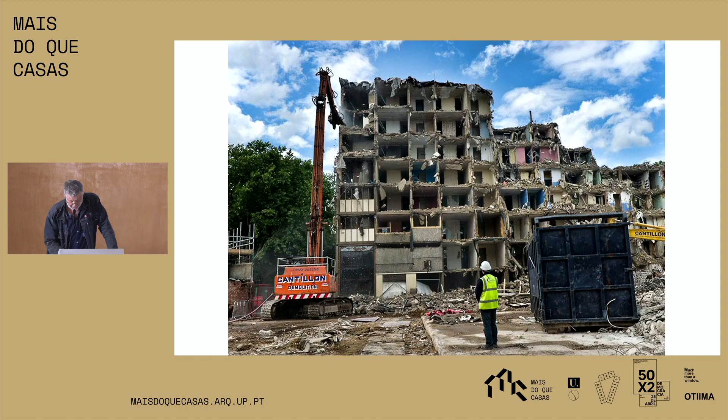That figure is now 15%, with the consequence that we now in London, one of the richest cities the world has ever seen, have 7,000 street homeless people living on the pavement, and another 30,000 people living in inadequate or poor accommodation. And that's because housing in the UK, and as it has for much of the world, has become a commodity—something that you buy and sell, something that pension funds invest in, something that global capital invests in, rather than seeing it as basic infrastructure.

So this is a question of inequality, and these are choices that we as a society make about the priorities that we have. There is no reason why we should be having homeless people in our country. And I think three things need to happen in order to stop that from happening.

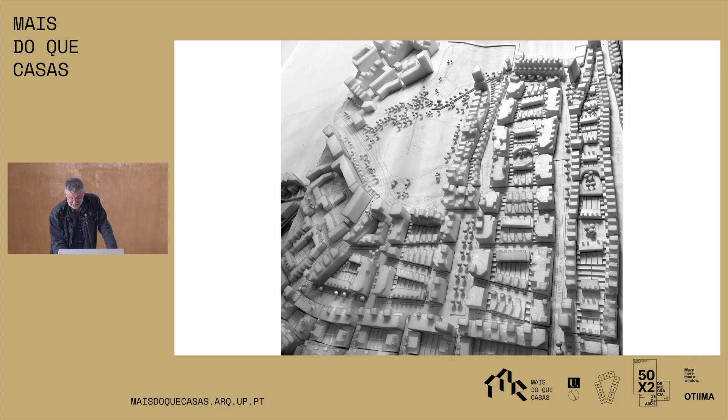So working on transparent paper, we build up our schemes like this. And this as one of the urban designs that we've worked on in the East End of London. Again, a foam model, a design model, not really a presentation model, but ones we can hack bits off with a scalpel, a very tactile method.

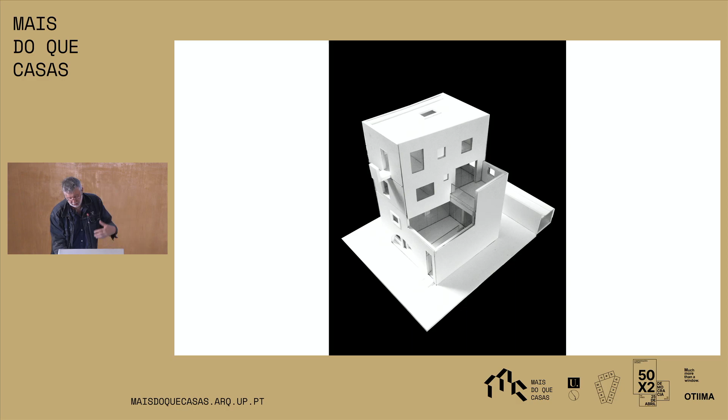Larger scale models and individual unit models, so we can go through the different scales as we explore the architecture that we're trying to create. So this brings me to the first of the built projects. I'm going to show you some built ones, but also some more theoretical and sketched ones.

And this is a project called Donnybrook, and it's in the East End of London. It's the kind of white pieces of building in the middle. It was a housing scheme, but we won a major competition by, when you do a competition, you have to do a board, before it was computers. And it's good to have something that catches the eye.

We said, this scheme is a celebration of the public social life of the street. It said nothing about housing. It was about this street. And I think our proposal was distinguished from many of the others by the fact that it has a new street going through it that way, and a new street going through that way, and at the intersection of those two streets is a new public space. Most of the schemes had a fence around them, and they were an object building. So I think it really appealed to the judges.

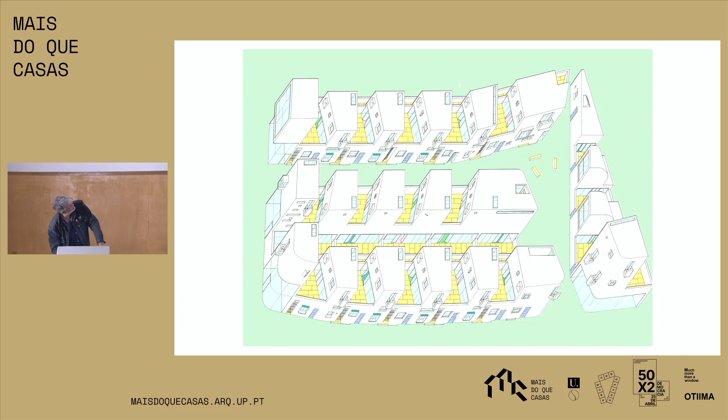There's an early axonometric drawing of it. It's an unusual scheme. It owes a lot to Porto and to Alvaro Siza. He was a big hero of mine when I did this. It's probably 20 years ago now.

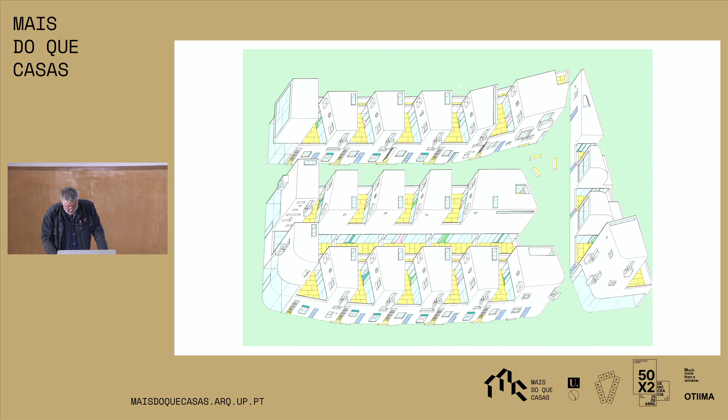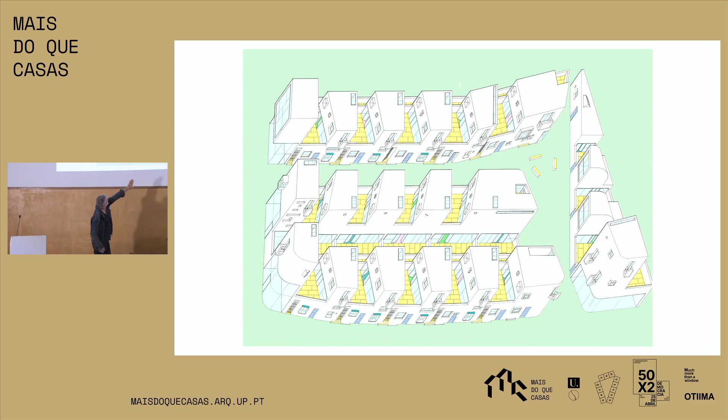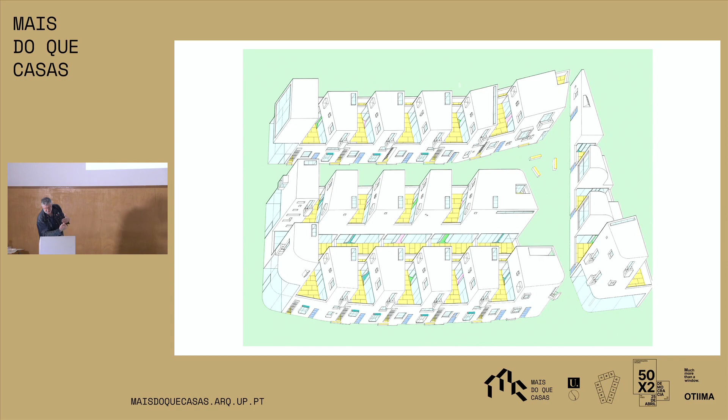And these are peculiar units, and I'll have to walk over here to do it. So each of those doors, the blue ones, leads straight into a home, and each of the gates leads upstairs to another home. So it's one flat on top of another, which is actually an old-fashioned type from London. So it's kind of terraced housing, but it combines the terraced housing with courtyard housing.

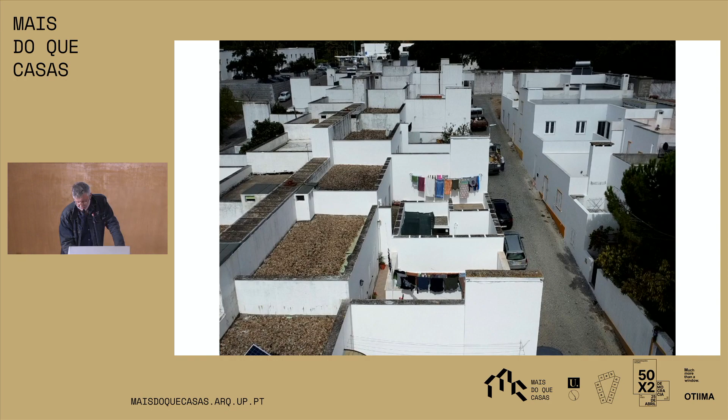And so they went ahead and built that, which took us by surprise. I was quite young and inexperienced, and it was quite magic when it actually was built.

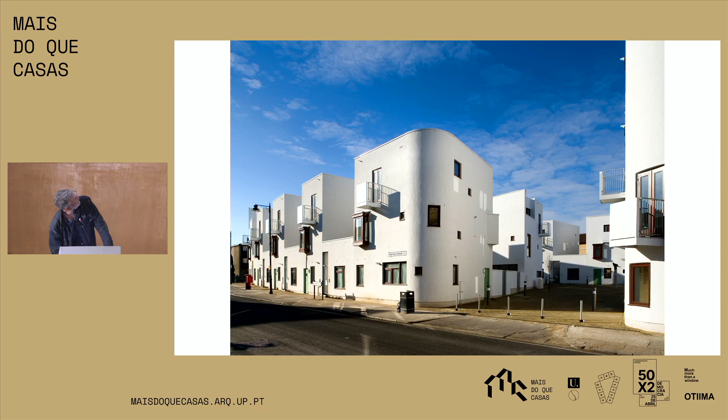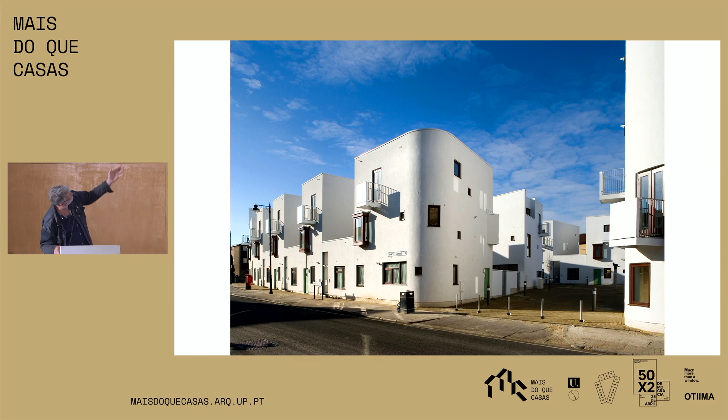So there's a lot of repetition in the project, but there are also special corners where something rather special happens. And I suppose to that extent, there's an interest in the picturesque or the filmic way of thinking about architecture. As we move around the city, views open up, and particular emphasis can be laid on the architecture.

How this works is that all the ground floor units are separated by a wall, which gives people privacy, and all the upper units are rotated through 90 degrees, so they all look into their own private first floor courtyard. And so it overcomes the rather paranoid overlooking distances rules that we have in our city. And again, it's lovely to see people moving in and taking control of those courtyards.

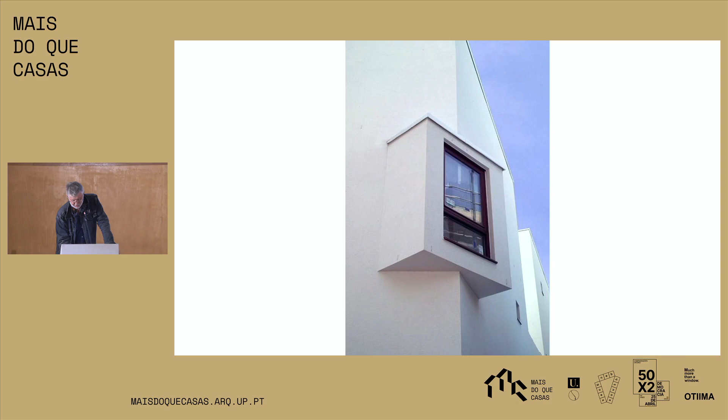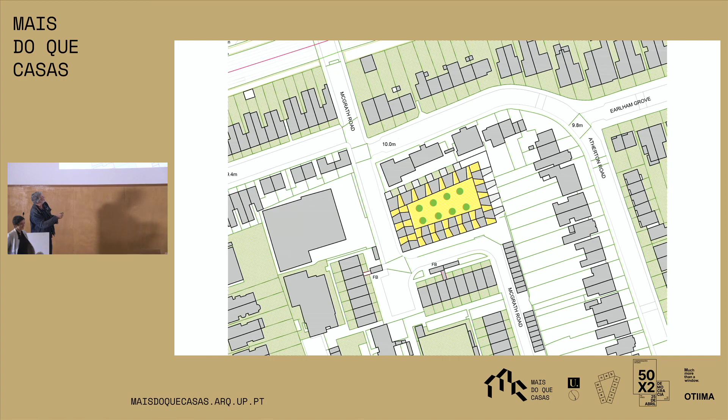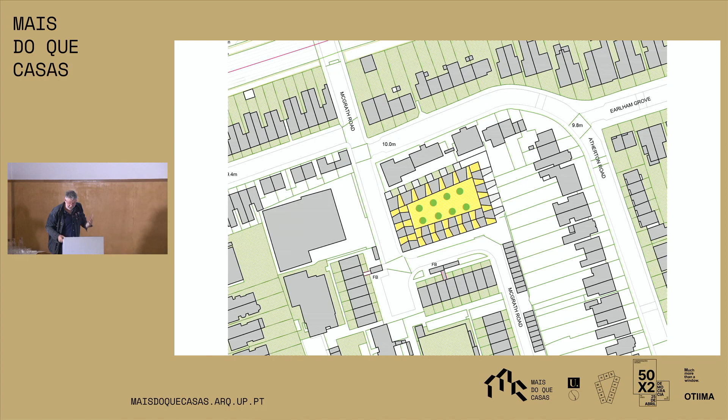Some houses looking that way and some looking that way, but no back. So there's one terrace of houses looking out onto the street, and another terrace of houses looking into the square. They don't have - in England we call that back-to-back housing. So there it is again - that's a row of houses there, and that's another row of houses facing into the square. Each house is three stories high.

It really is a house, not a flat. You have a front door into a kitchen, a bedroom, and then a living room on the top floor. And rather than having a back garden, you have a little roof terrace in these notches.

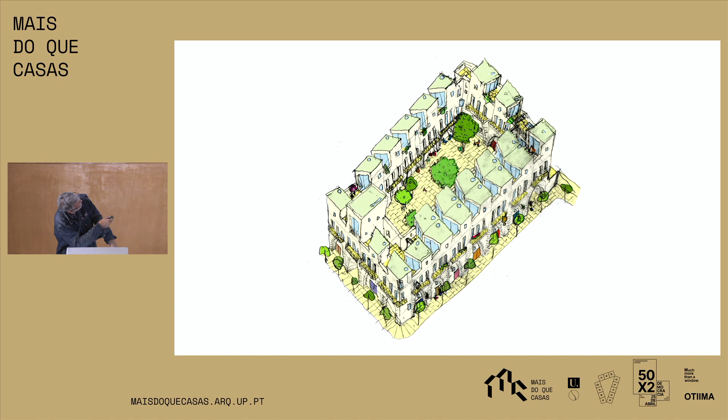This is a traditional form of housing, most of which has been demolished because it was considered to be slum housing. But they've saved a few in the city of Birmingham in the north of England, where there were 30,000 houses like that. And I was worried about proposing this sort of housing, given the reputation it has. So I went to visit this place, and I thought it was really lovely. These houses back in the day had very poor sanitation and were poorly maintained, but had they been properly maintained and given their own bathrooms and so on, I think they would have been fantastic. It's very sad that they were just swept away with the bulldozer. In fact, I was shown around these houses by some people about my age who'd grown up in houses like this in the 1960s. Their houses were knocked down because they were considered slum housing, and the people were moved out into tower blocks on the edge of town, and their whole social world was destroyed. So a sad story, really.

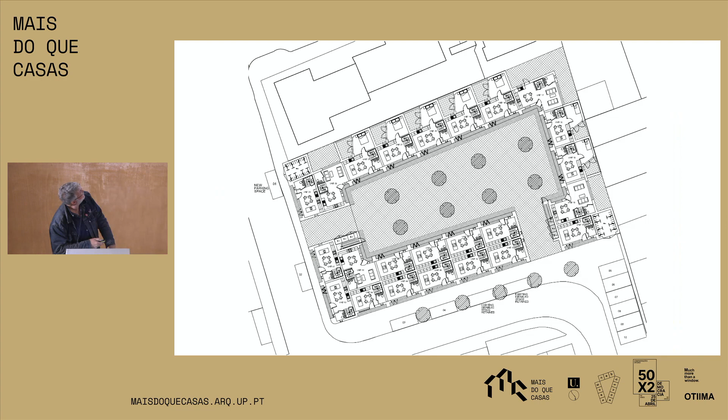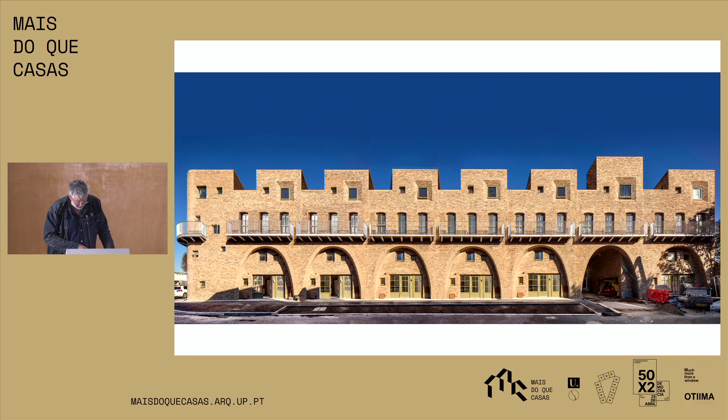But we kind of revisited this - as I say, there's a row of houses, there's another row of houses, and there's the central courtyard. And again, miracle of miracles, it got built. We had a wonderful client in the form of a local borough, a public body in the East End of London, and this is for people who need social housing, so it's inexpensive housing. So a kitchen, bedroom, and then a living room on the top floor with a roof terrace, and that's the way through into the central courtyard.

It wouldn't suit everybody, and I think people try to generalize about housing - housing should be this, or housing should be that. I think for some people, to live in a house on the edge of a street and knowing one's neighbors is their ideal environment. For other people who prefer more privacy, that would be difficult, and they'd rather be high up, maybe even in isolation at the end of the day, going to their flat at the top of a tower block, on their own with a lovely view of the city and not interacting with their neighbors. So I think a variety of different sorts of housing is needed. We have very stringent rules about how housing should be organized in London, and it's a real problem because it imagines that we're all the same, and I think different temperaments and different physical abilities require different kinds of housing.

So that's the top floor with the courtyard, if you want to be on your own and private. Again, it's lovely to see people move in and the trees get bigger, and people take control of these spaces at the front of the houses, which we hope will be like, in the southern states of America, the stoop or porch at the front of a house where people sit out, and it blurs the division between the interior of the house and the external space of the street.

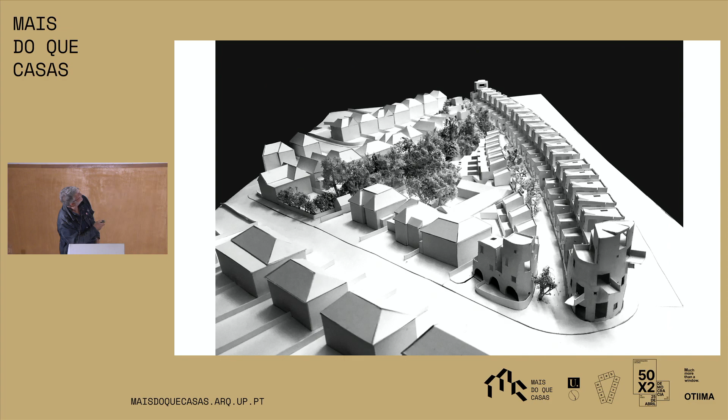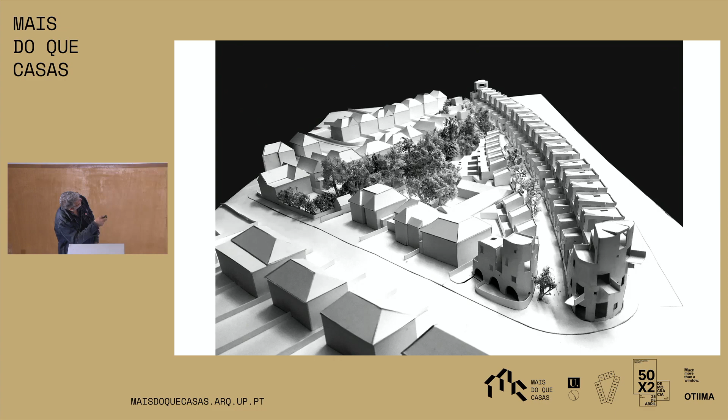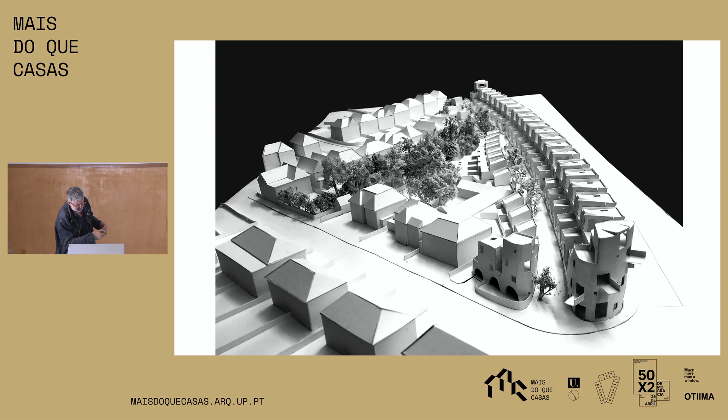So we're now next to a very, very busy road. One day somebody's going to give us a lovely site next to a river or something, but we generally get a railway line or some unloved strip of land next to a road. This is called the North Circular Road, a 6-lane motorway. Our intention was to build a large 4 or 5-story high building along the motorway and create a quiet little street behind it, protected from the noise of all the cars, and then a second, very slender line of buildings which makes the other side of the street. It felt important to us that a street has 2 sides to it.

So there's the sketch. And again, they built it.

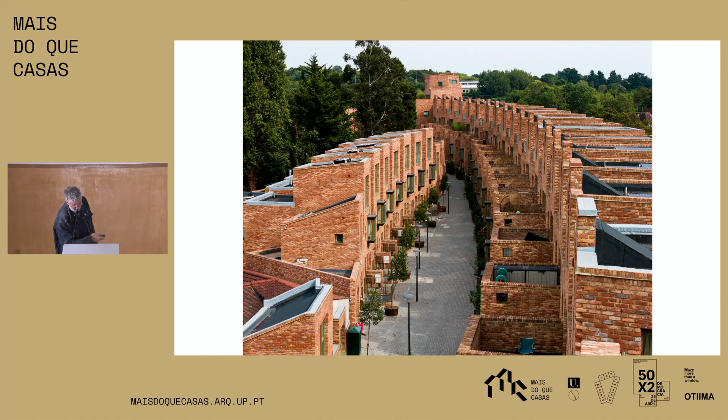So this space, a bit like you were talking about your decks, becomes a space which is shared by everybody who lives in these homes. People have already started to use it in that way - playing football out there, kids hanging out, people putting chairs out, which is a really lovely thing that is starting to happen. And there's the less nice side of the project, but still this very heroic kind of front presented to the main road, but then this much more domestic kind of environment tucked in behind.

So each one of the buildings on the right is a little apartment building with 4 or 5 flats off a stair that you walk up in each case. And these are more like houses or double-stack maisonettes, a bit like Donnybrook.

And so that is somebody in their flat overlooking the main road. The important thing about that building is that, yes, they look over the main road, but because it's a very thin building, they all have a view and openable windows out onto the very quiet mews behind.

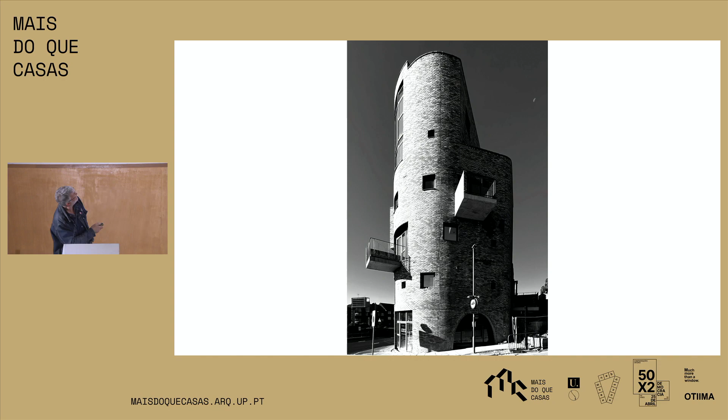So I think this is the last of the built projects. How are we doing? Not too bad. Last of the built projects.

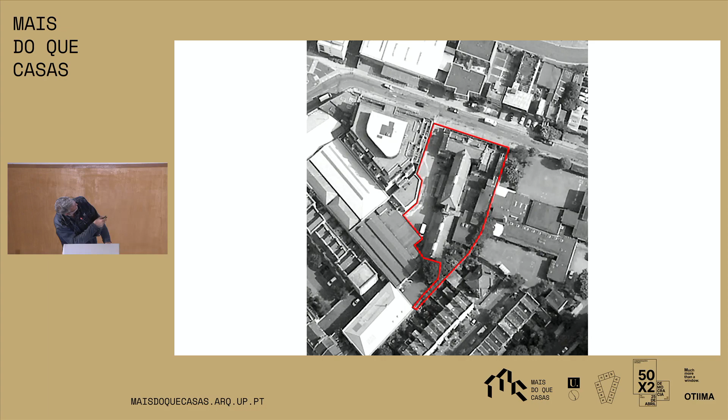This is a homeless hostel in North London, for people who have been living on the street. It's an old building fronting the street, and we have other buildings out the back. So we decided to retain the building at the front, but that this single-story building at the back should go. One of the problems with homeless hostels is that they're usually organized around spaces like this. You're talking about some of the most vulnerable people in society, many with mental health problems, many with drug or alcohol problems, many who've been living in a cardboard box on the street, many who've been kicked out of either their social housing or their family home for one reason or another, and this is where they end up.

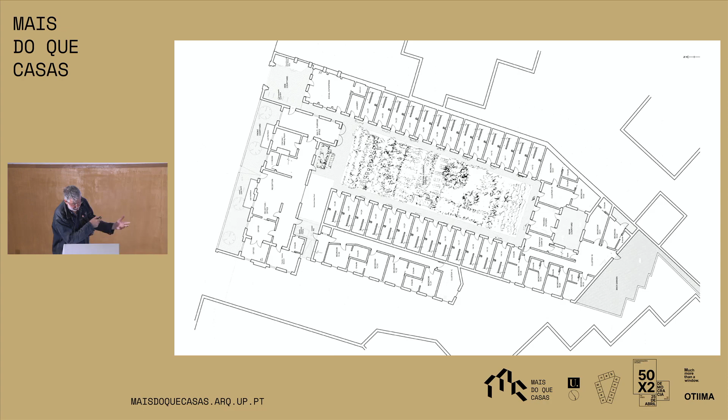So we thought it'd be interesting to imagine a different kind of hostel, one with an open space rather than a dark, dingy, horrible corridor. We encouraged our client, who again was a local borough - so this is a public building - to maintain the existing building onto the street, but to build a new building which wrapped around a garden, with each person having, rather than a room off a corridor, the tiniest little house.

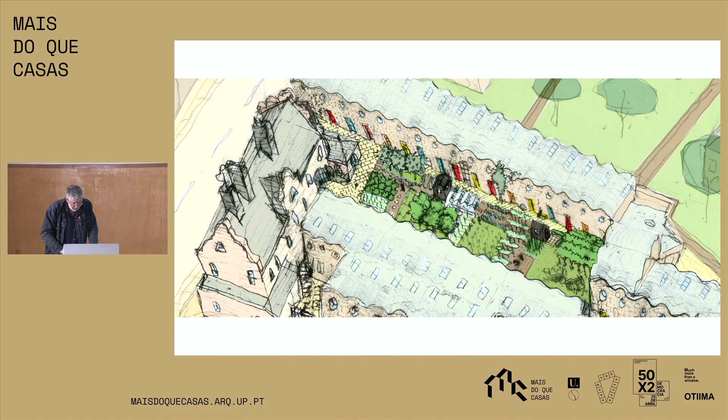We made a really expansive and welcoming entrance hall, which is very unusual for buildings like this. We designed this space where we imagined people who would otherwise perhaps be sitting in a darkened room freaking out, coming out and working with a gardener to create a beautiful space like this.

When I went to see Camden Council, who are the clients for this project, I read them a little paragraph, which I'm going to read to you: We imagine a group of residents working with a gardener to create and maintain an intensely planted and beautiful garden, with an apple tree or two, potatoes, green veg, soft fruit, herbs, a greenhouse, a potting shed, and a sunny spot to sit and rest.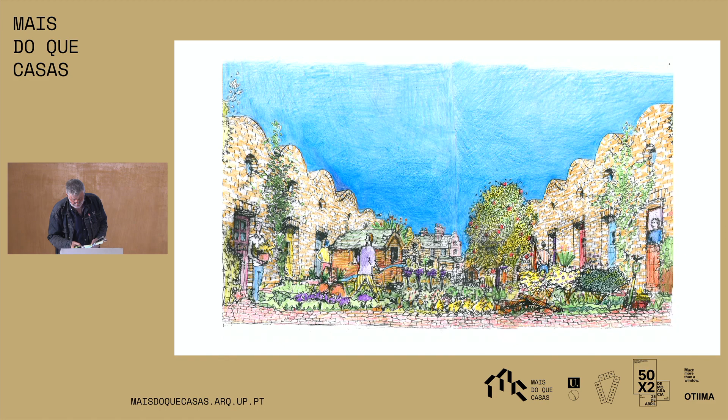We think there ought to be a little room or shed in the garden for private chats and counselling. Conceived as the social heart of the hostel, the garden creates a homely, domestic atmosphere. It gives participating residents an interest and an outlet for their energy, helping to foster a sense of belonging, self-worth, and empowerment.

So that was it during COVID, and slowly the gardening project, which is a formal part of the treatment of these people in the hostel, is coming into being. Somebody is employed, a horticulturalist and a therapist who comes in and invites people out into the courtyard and works with them. This is another hostel we've done where the garden's on a smaller scale, but again this forms a really important part of the treatment of these quite often troubled and disturbed people coming out and working in the garden.

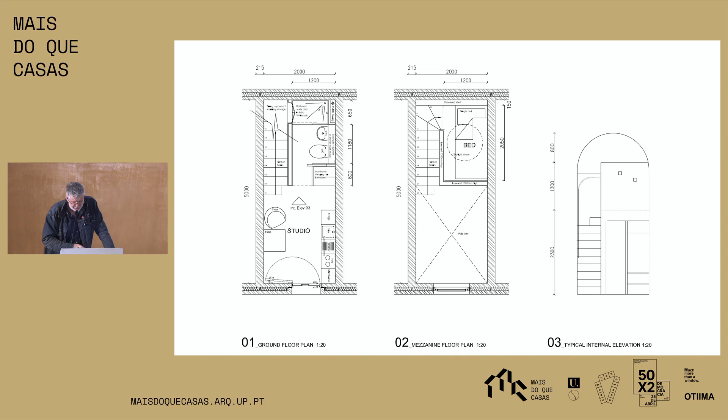That's one of those tiny houses. So you walk into a little tiny studio space with a kitchen, shower room under there, and up onto a little bedroom platform there.

I'm going to close with some images of some more theoretical projects. I always keep a sketchbook, trying to keep my mind alive when I'm in the world of trying to make buildings in the here and now, trying to imagine a better world, a more ecological world, a more equal world. I find myself sketching these, making these little sketches of other types of settlement.

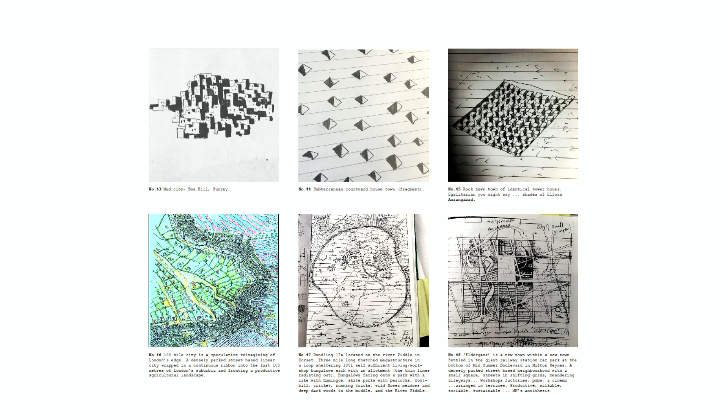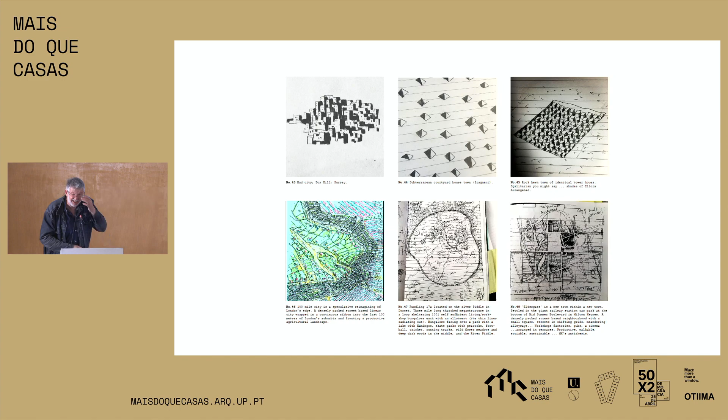Some of them made out of mud, some of them made out of hemp, some out of stone, some carved into the ground. The sketchbook is a wonderful place, and particularly to the students amongst you, I would really encourage you to make the sketchbook a really important part of your education. I do it to this day, and it's how I keep my mind alive in the context of the very trying at times experience of making buildings in the crazy economic and cultural environment which we enjoy in the here and now.

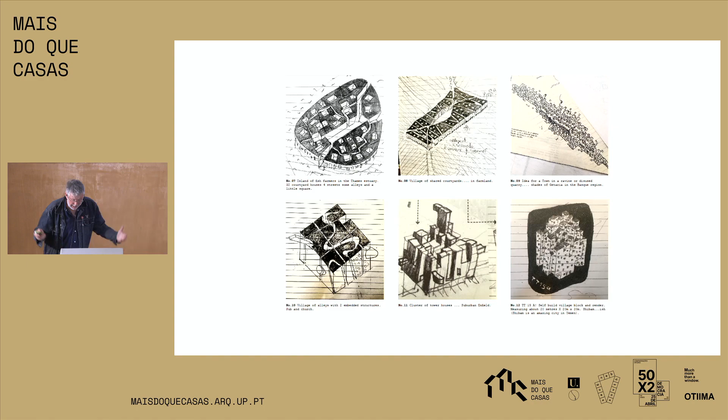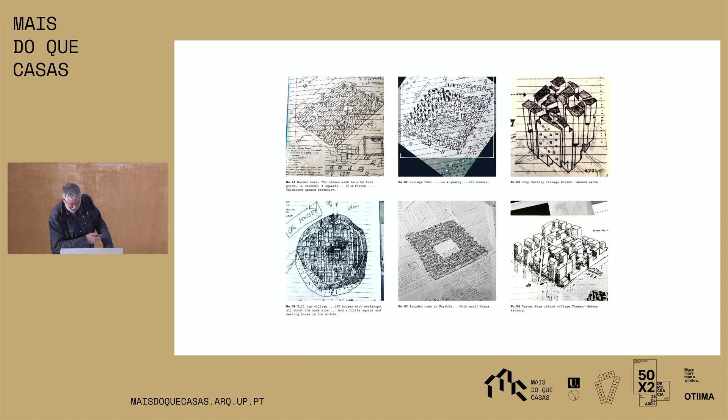So I try and do one of these a day. It doesn't always work out. Try and design a city a day. Sometimes they turn into models. This was an island - actually the white is the water. It's in the Thames estuary, and the idea that these buildings might be made out of sort of gravel and stuff that's dredged out of the bottom of the river.

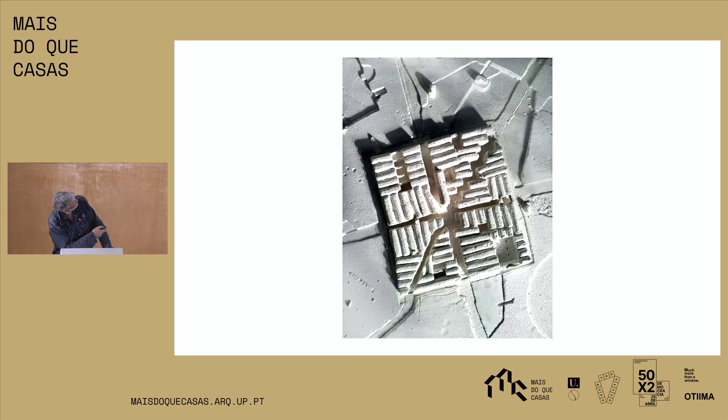And the idea of a little village made out of mud in south of England. I'm going to leave you with some images of one of the projects, which usually take a day - this one took a bit more of a hold, and it became known as 100-mile City.

It's an idea about if we need millions of homes in London, rather than knocking down bits of the middle of London, and rather than allowing suburban sprawl to go out into the green belt which surrounds our city, what about a really intense city? Like a little piece of Siena or Porto, in a 100-mile strip which wraps all the way around the edge of London.

Well, it's a provocation. It makes people think, doesn't it? That's what one tries to do with this sort of thing.

Build a street-based linear city 100 miles long, 100 meters wide, and 4 stories high. Wrap it round London. Give it little factories, schools, houses, and shops, laid out in terraces along intimately scaled streets and around squares. Make it a dense, intense edge to London, a confident, purposeful boundary, fronting a revitalized, productive countryside.

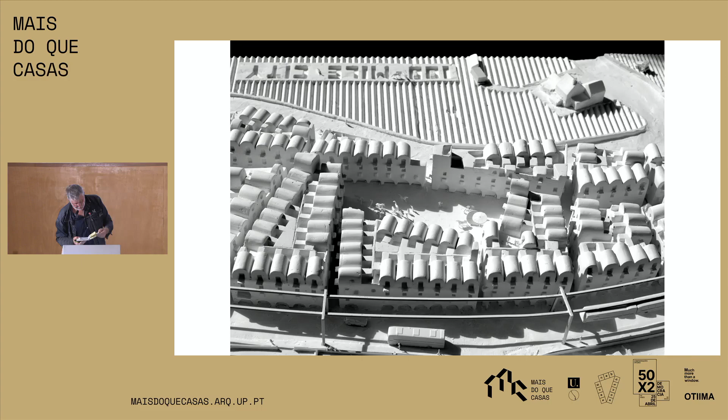Metroland backfilled, integrated, urbanized, London for 40 million people, a kind of inside-out plan voisin, ville radieuse, Blighty style. That's it.

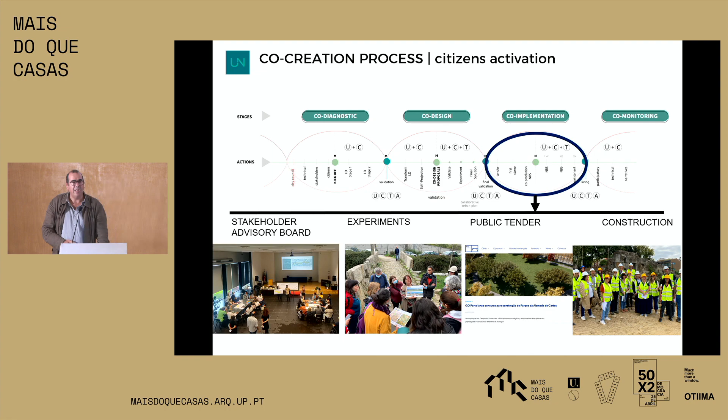But then there's the moment of the public tender, where things get more complicated. For instance, in Porto we had one public tender that failed. Now, finally, things are under construction, and we hope to finalize everything next year. And then there is an important moment of monitoring.

We need to understand if what we are doing in this research, but also in the practice, makes sense. So we created an observatory to collect all the data produced in the project, and developed quantitative and qualitative tools like surveys to understand how people use the public space, what we call the well-being survey. But the most important is the social observation, being in the field to see how people actually use the space. This is the phase that we will start soon.

And this is the result, the strategic healthy corridors for each city. We tried to design it in the same language so we could compare and see how this concept was developed in each city according to local cultures and local needs. This idea of a green structure aggregates several solutions that come from the citizens.

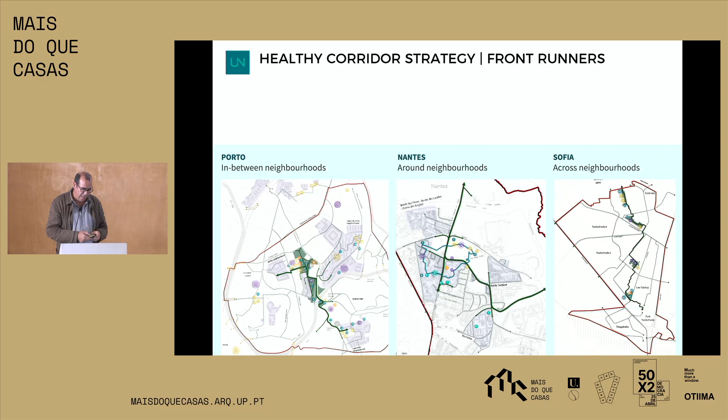And they take different shapes. For instance, in the case of Porto, it's a structure, an infrastructure in between neighborhoods. In other cases it's a kind of loop, a circular path around neighborhoods. And in other cases it's a linear path that activates, as in the case of Sofia, four squares in the Nadezhda neighborhood. The same happens a little bit in Nova Gorica, Siena, Brussels, and Denmark.

So, two or three examples of these results. For instance, in Nantes, the corridor is almost built. It's a more fragmented space, because there was already another team in Nantes North working at a larger scale.

So we are activating some spots, and here these 'places to read' from our colleagues from IAAC, developed with the community, or a public space that has a kindergarten in the middle, this Canada Park.

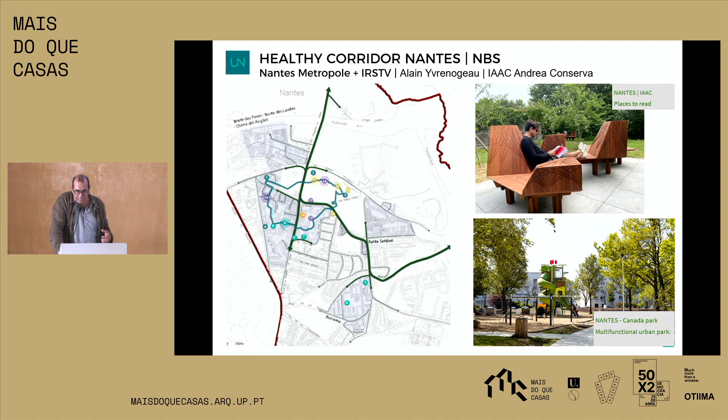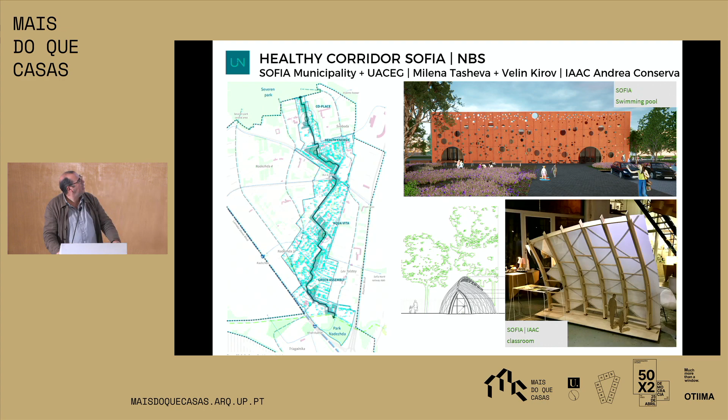In the case of Sofia, it's interesting: they launched a call for students to develop a swimming pool, because there is a thermal tradition in Sofia and they want to build one. Beyond the construction of the corridor, they are also developing this classroom, a very innovative space that is now being built.

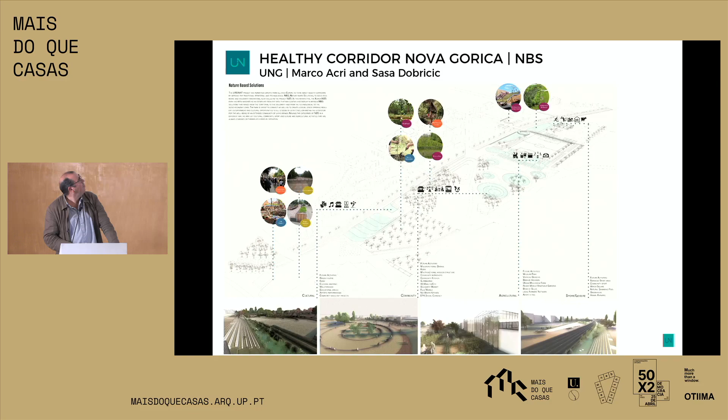In Nova Gorica, I'd also like to bring this very nice landscape approach from our colleagues at the University of Nova Gorica, trying to understand the before and after. It's interesting because as Nova Gorica was a follower, they won't have the budget to build, but since Nova Gorica is now capital of culture in 2025, they integrated the corridor into this cultural capital program.

Finally, this project also has a pedagogical approach, and we developed a summer school where Teresa Novaes was involved, in Coimbra in July, where we put everyone thinking about this project for Coimbra, since Coimbra was not one of the cities. So this is something we are doing in several cities, activating these workshops.

So I'll give the floor now to José Miguel to tell us a little bit about the work in Porto.

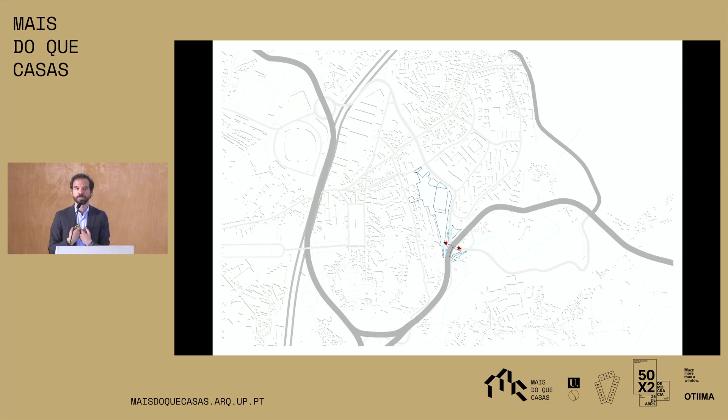Why is this so important? Because if you look at the territory, in one kilometer of extension, the only pedestrian crossing point is under a viaduct. This is very important—feel the physical distance, and anticipate the psychological distance. This is emotional.

If you spend one day there, you start understanding how people use it and how the territory actually shapes the social life of people. And I'm going to reinforce this: the territory shapes the social life of people. This is one of the clear needs of urban regeneration.

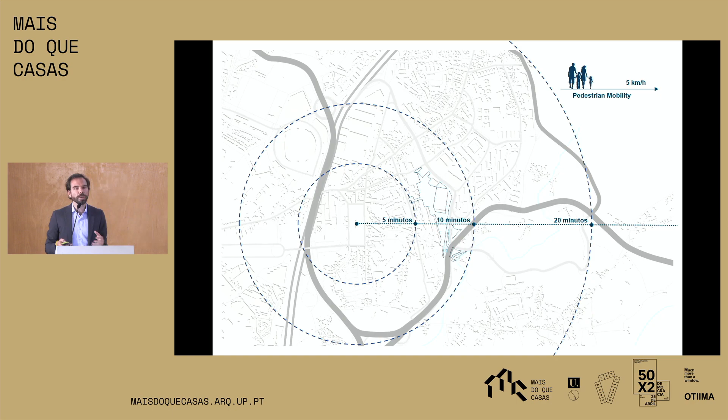Because we had money and time, we conducted an assessment on how people move, using a human-centric approach. One thing we realized is that in this territory, you can actually meet what Paris has been dreaming of—mobilities where you go from your house to school, to the supermarket, to the metro station, with trajectories under 15 minutes. We actually measured them, using Jan Gehl's method.

We went on site, and we started asking people: where do you come from? Where do you go to? What's your main trajectory? And we overlaid everything. So this was a behavioral mapping that we did, and this gave us an insight not just on how many people, but most importantly, who are these people.

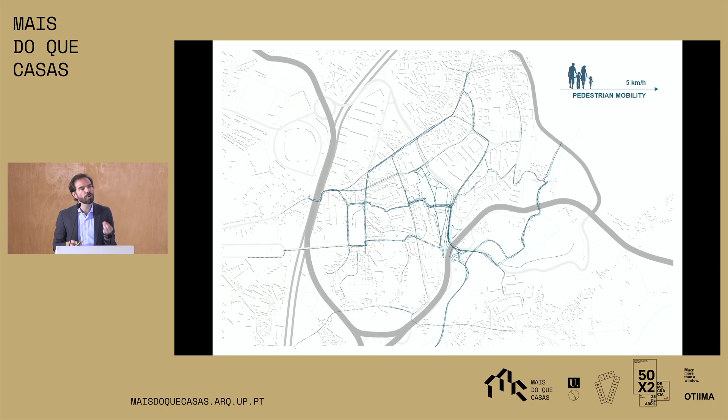We saw lots of handicapped people, lots of young parents with children, so it's something that we know we need to include into the project and feature into the design. Pay close attention to the core central area — you see there is a huge overlapping of lines in there. This is the area that people used to cross.

So if you zoom into that core area that we identified, this is what you get — a territory where people used unpaved paths to move across. If you just listen to these people, and value something they're already showing you they need, then you'd have already granted the success. And this is something quite unique.

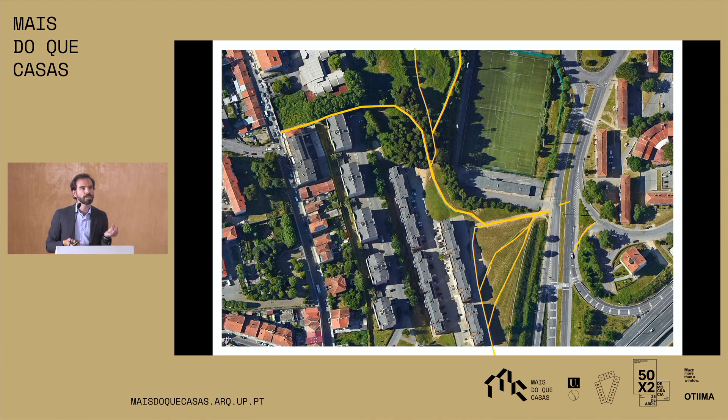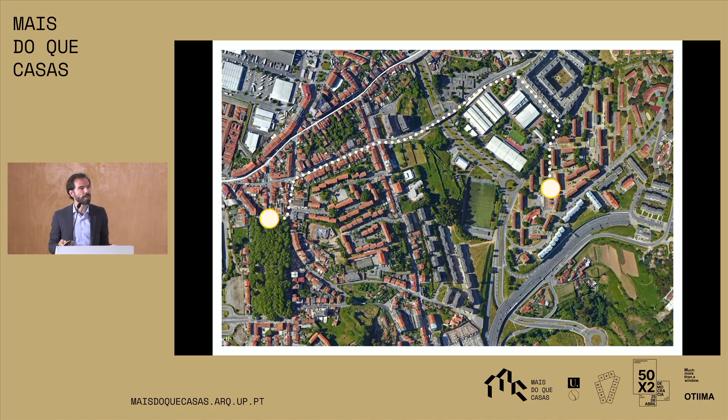One of the most used paths in the territory isn't consolidated. And how used is it? Someone who lives in Cerco do Porto and works in Corujeira, and there are many such people, if they want to go to their workplace using sidewalks, it takes them 16 minutes. They have to go up and down. Of course, nobody does that. Everybody takes not the car path, but the pedestrian efficient path.

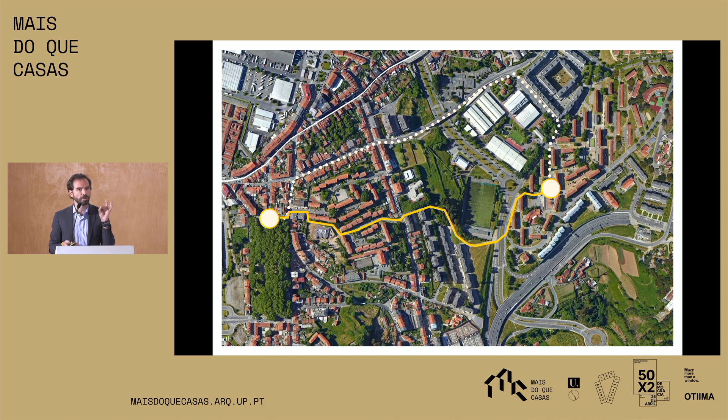And this is one of the key messages: this takes 8 minutes, and it's faster. It also has a very important feature, which is that it connects to the 4 main schools of the territory. Because of that, in the morning at 8 we measured 48 people, and at 8:30 we measured 48 people.

Some of these people, because of economic conditions, have to do this path 4 times a day because they cannot afford the lunch meals at the school for their kids. So this is the existing condition we have. If we just value this, we would have already assured the success of the design.

And we expanded this — this is very important because we cannot just act on that area. If we create mobility conditions, it needs to connect somewhere. So we did this research map. This is the first time we see a map designed according to the way people move and not according to the way cars move.

We all have thousands of maps in our hands every day. They're all designed for cars, not for people. One of the things this map reveals is that 25% of the pedestrian network of this territory is made of unpaved paths. This is a clear demonstrator of the need for urban regeneration, a clear demonstrator that we should act on this territory. It's people that are telling us how to act and where to act. This gave us the confidence that we could act in there and there would be a continuation.

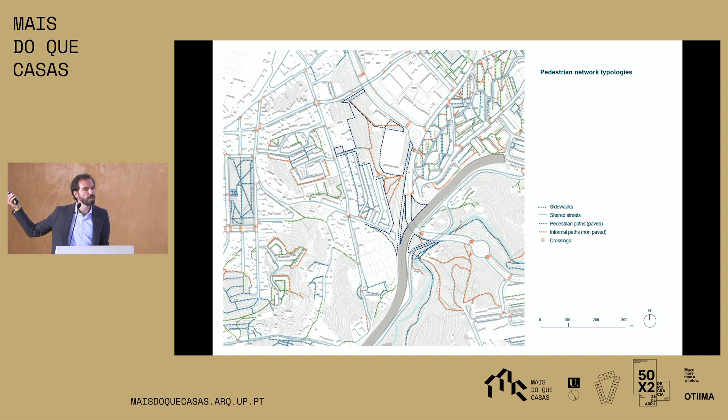Another key component of this landscape design project was that we studied this side — the side of the handicapped persons, the old people who cannot move easily on the territory. But as designers, we know we should always go for the extremes. So we also studied the other extreme: sports activities, because public space has a very important role in providing opportunities for sports.

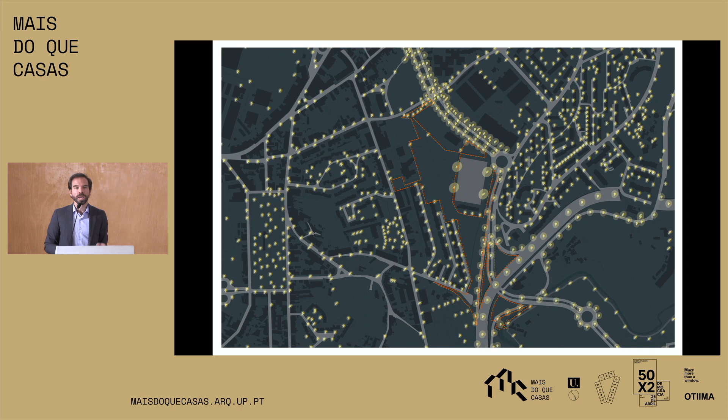On a territory that suffers from light pollution—and urban light pollution is an issue in all European cities, that's the reason why we cannot see the stars at night—because of the soccer stadium and the highway network, by contrast you can see that the most used area is not lit. If you leave a very overly lit area and get inside an unlit area, what you get is this: a very, very dark area.

And as you all know, in Porto, at 4:30, 5:30 in the winter, it gets dark. That's why parents use their cell phones to take the kids to school at night. So this is what you see: people with cell phones lighting the path.

So there are lots and lots of clues in here. We just need to respect these clues and value these clues. This would be one of the most important things that you could do for these people. This is a project with a strong social impact, and the impact is an impact on everyday life.

We look at this intervention area as an urban acupuncture solution because it unlocks the most important mobility trajectories in this area. But there is also one key important thing to understand, which is that this is an area that's part of everyday mobility of people.

This is going to lead to the development of Parque da Alameda de Cartes, which is in construction, but it's not the standard park of Porto where you take your car, go down Avenida da Boavista, go to the city park, make a picnic, and go back by car.

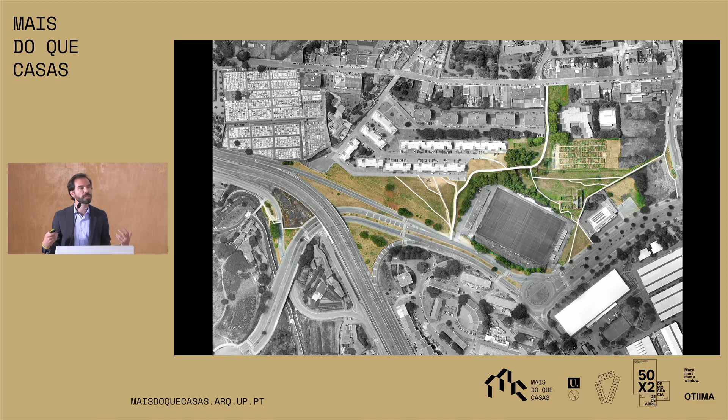So this is the canvas that you had to work on, the canvas that reveals the scars of the territory. A canvas whose main path can reach in certain areas 30% slope, and where we have people that fell and broke their hip. For a person over 80 years old who breaks their hip, their expected lifetime is 1 year.

And we also had landfills, leftovers from the urban development constructions, that were just left there, creating a huge visual blockage. And if you're not seen, and if you don't see, you don't feel safe. So we know that we need to increase the perception of safety.

So this is the landscape design. Each of these paths is a consequence of a diagnostic. Each of these solutions embeds everything that we have collected, both from a specialist point of view, but also from a participatory point of view.

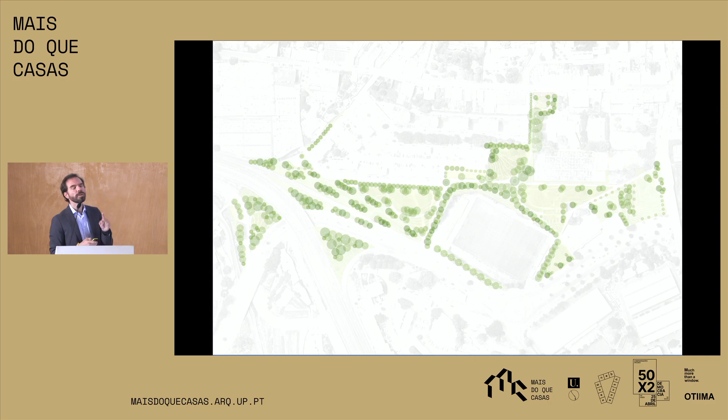We address the scars of the territory, the topography, and we also addressed it from an ecological perspective and a planting design perspective. It's very important that we are aware that trees are like humans, they like to be planted in clusters. The systemic effect of planting trees in clusters, from an ecological and aesthetic point of view, is much bigger than planting the same number of trees individually. And this also allows for visual accesses to be preserved.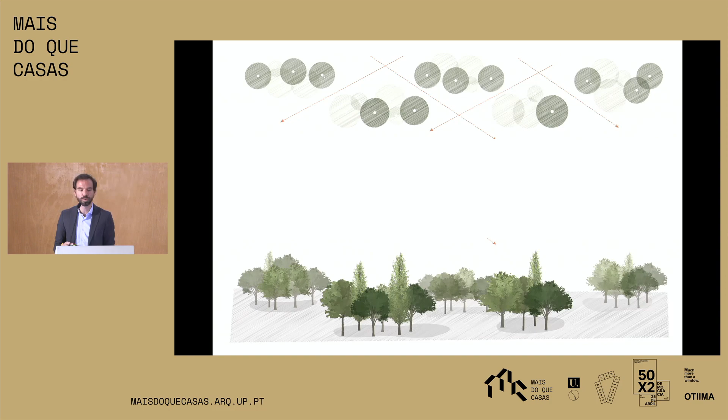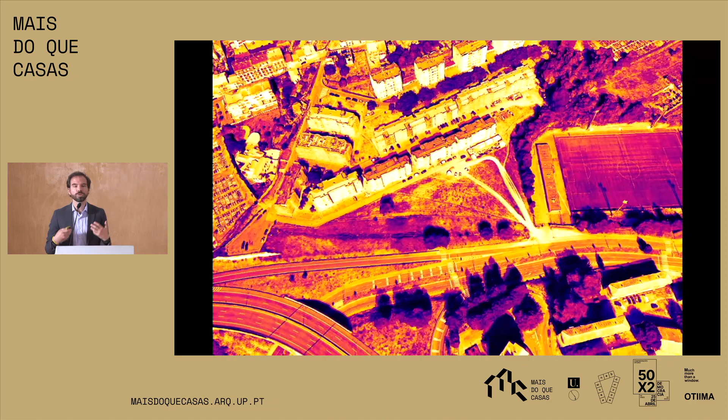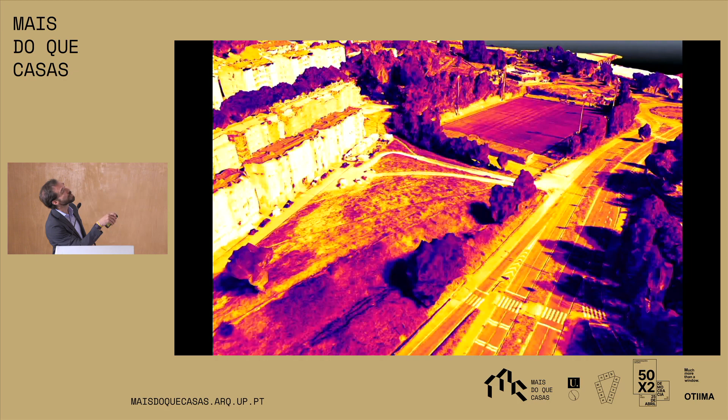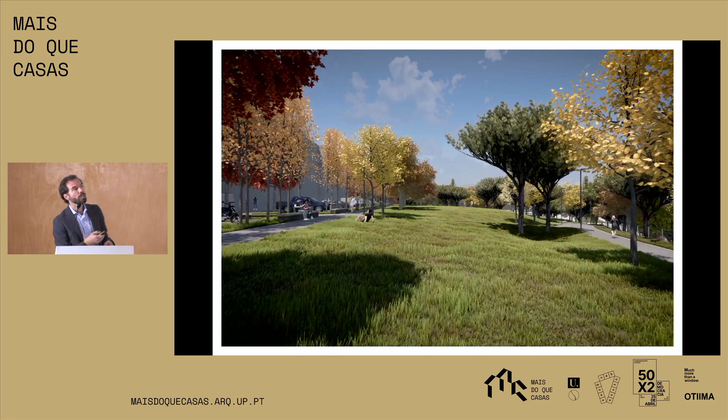All of this planting was also done according to the evidence, to the thermal behavior that we mapped. We did drone mapping to try to realize how the territory behaves thermically, and we could see that on the same day in summer we had a peak of 42 degrees in one area, while at the same time we had 25 degrees in another. So planting design was made according to the climatic conditions, and we selected both deciduous and evergreen species to make sure that in winter the sun radiation could reach the pavements.

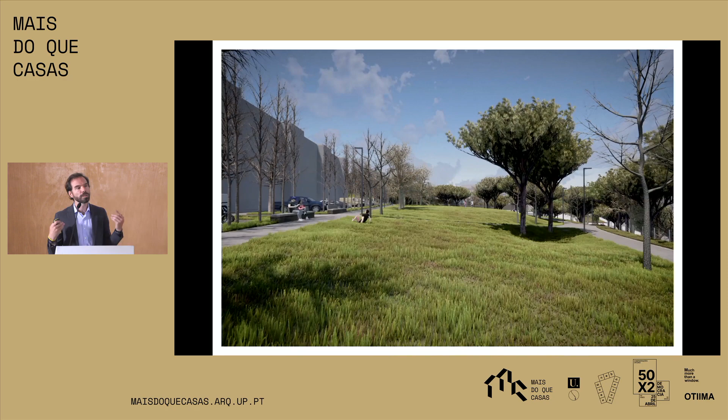Everything was made in VR, because landscape designers tend to like to see the world as if it was going to be seen and lived from above. We're not birds. We use and we live the space at eye level, we walk at eye level. So the fact that we had a tool that always placed us at eye level was key, was fundamental, because it granted us the humility to understand that sometimes our design was wrong and we had to revise it.

Next, one of the most important images for me: landscape designers tend to deceive people, we overpromise. We always promise people the idea and image of beautiful big trees, but that will only happen in 20 years. We have made this now in a way that we added fast-growing plants, which are going to dominate the landscape in the first 5 to 10 years. They're there to create the conditions for the slow-growing carbon fixators.

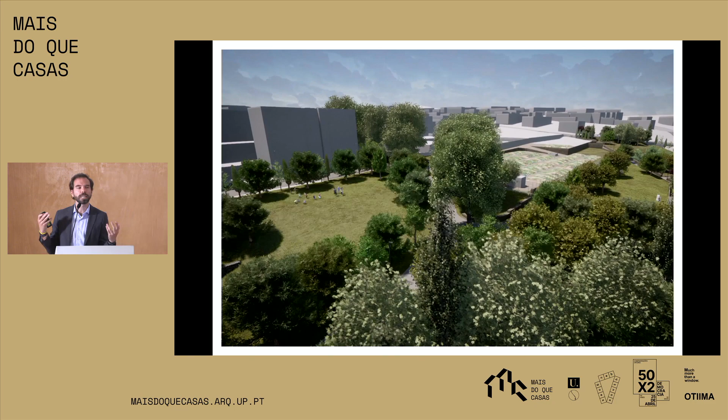So these plants will need to be removed. Yes, you have a landscape architect in front of you saying that we're planting trees to remove them, because that's how the ecosystem works. We're going to plant them so they can create shade in the first years, they can dominate the landscape, but they're there to create the conditions for the oak trees, the climax trees for the Portuguese context. And this is the site of the ruin that Gonçalo was also introducing.

It's very important, just as a side note, something that we always implement in our landscape design projects: 100% of the water that falls on site is managed on site. All architects, all landscape architects, all urban designers will have to face this important challenge. Whenever you're developing, in some countries you need to put the water into the ground.

We first did that in the parks of Asprela, we tested it there. We designed things so that once every 20 years, once every 30 years, the system would work and the water would be retained and infiltrated in the park, and the water would not damage the city. We have Rui Ramos here, to whom we owe a lot, because it's thanks to him and Professor António Cardoso that Asprela Parks exists, and that you have these solutions that you can visit and that have been tested and stress tested again and again.

Because the heavy rainfall that you're expected to have every 20 years in the Asprela parks, we had 3 in the last 2 years. So the calculations are wrong, and we need to design and be extremely good in using the public space, the permeable space, to put the water into the ground, to recharge the aquifers, so we don't damage the ecology of the site.

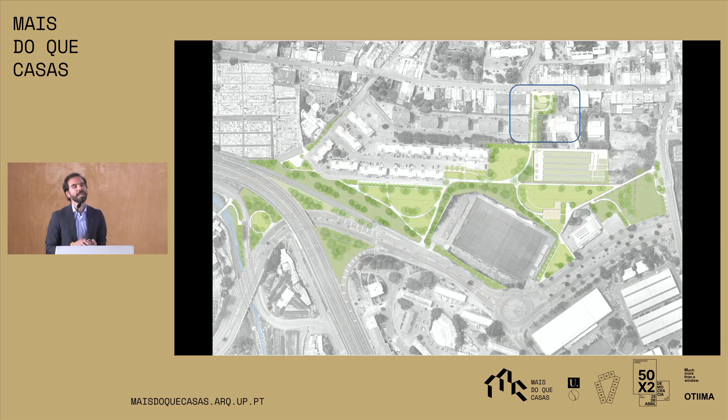I finish, I know you're probably hungry, I finish just with this, with a part of the project that touches me the most. This is the school of Falcão. Many times I have walked in this street and I never saw the school. But if I had gone in there at 8:30, and we've been there at 8:30 recently, then the children would occupy the street.

And if you know, in Barcelona, since 2018, if you have a school, it's mandatory by law that you need to have a plaza. If you don't have a plaza, let's demolish the building to make the plaza. Because the plaza is a safety point to put the children, and it's a social space for the parents to interact and to get to know each other.

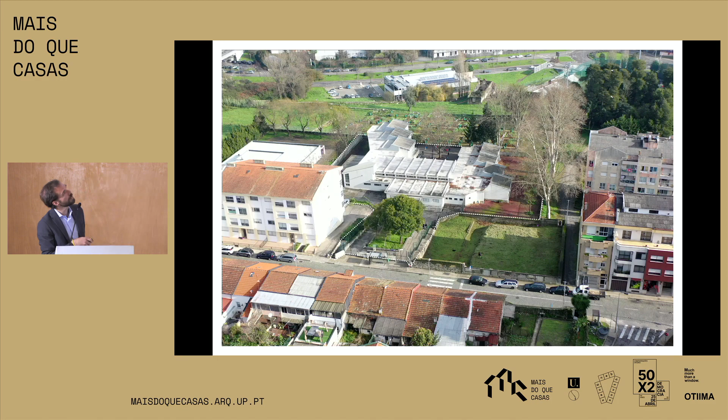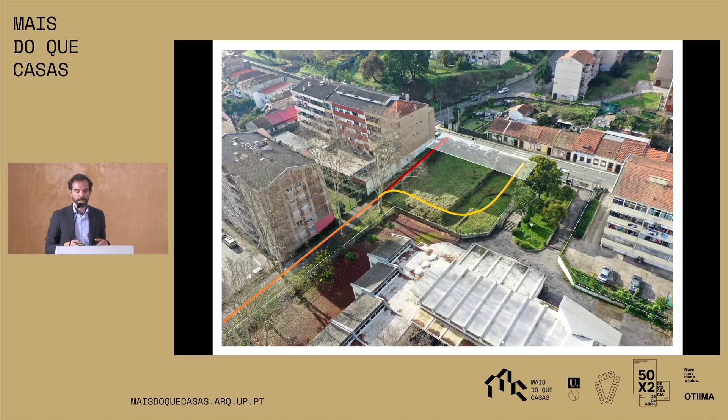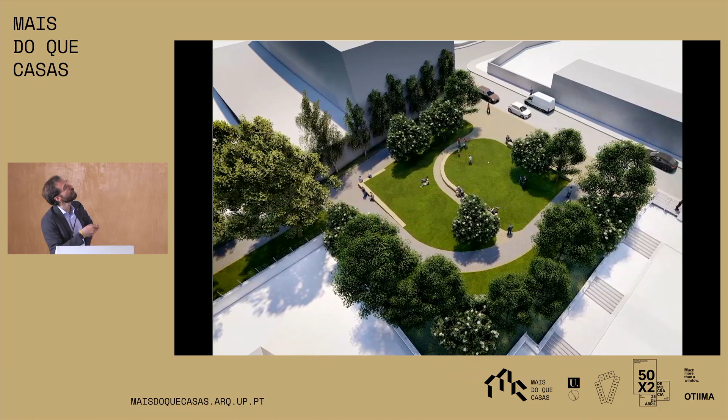So this is the area that we propose to the municipality that should be included. This used to be an island, someone already mentioned an island, with 15 houses in here, very compact, and it was a challenge. We designed it to create this social area, and the entrance of the school is going to be lateralized, so we have a flat social area, a flat active area, and then slopes to make the transitions.

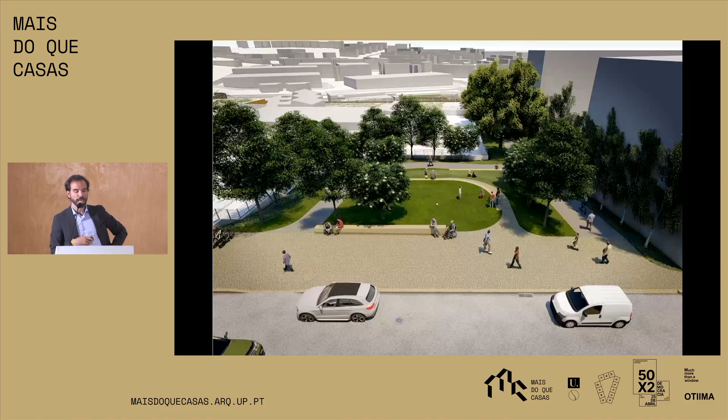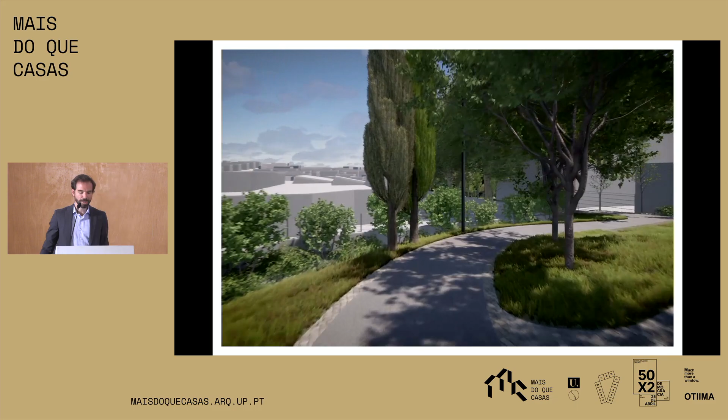So this is a very important social infrastructure that came as a consequence of a diagnostic, and this is one of the key images I'd like to show. And I finish just with a view of what we call the healthy corridor in Porto, and just so you can grasp a little bit of what's here.

And construction is happening. Sorry, I actually forgot that we had this. And with this, I finish saying that this is a small contribution that we want to give to the social, ecological, aesthetic, economic life of Porto. But this is something that I believe fits very well the framework of More Than Houses, which is the space between spaces. Thank you.

Okay, I think we can now initiate a bit the discussion of these 2 presentations with regard to the same issues but different quality of questions. And I will begin with Peter. You have just presented an impressive work on housing processes within the contemporary context.

I'm going to pose you 2 questions. One is more related to urban governance models. The other is more related to the question of creative processing, related of course with social housing. At the beginning of your presentation, the first image, I could not help but think about the price and costs of a piece of land in central London, even considering these prime places, or in other huge cosmopolitan cities, and the costs of design and construction processes to follow a line of social housing.